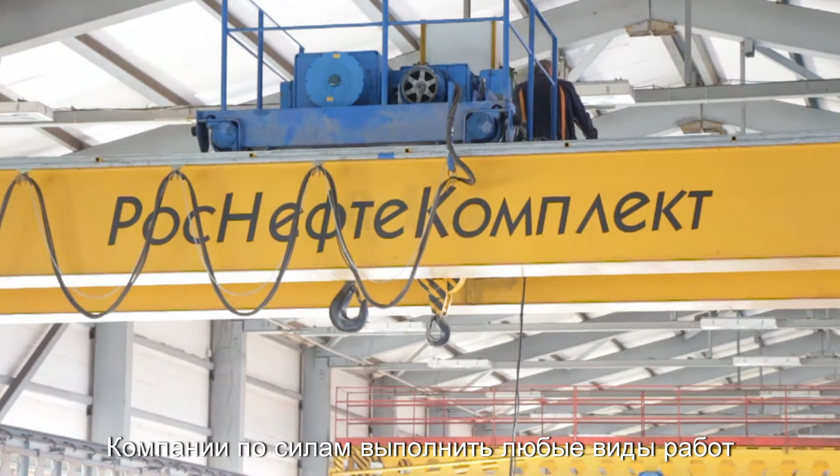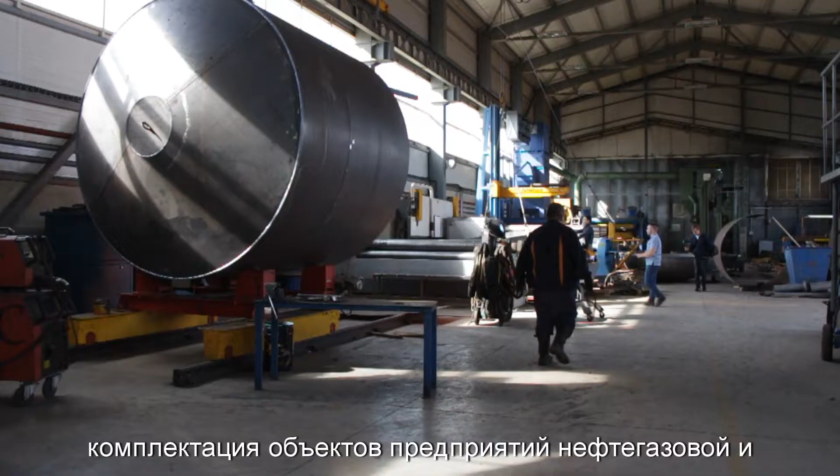At the moment, Rosneftekomplekt has a wide range of services. We are capable to fulfill different activities: construction and reconstruction, fabrication of packaged products, fabrication of tanks and vessels, fabrication of steel structures, engineering procurement for companies in petroleum and power industries.

RNK is a big and coordinated team. Our specialists have got everything to resolve process tasks of any complexity, that is to say, professional knowledge, high working efficiency and commitment, pursuance of perfection and teamwork skills.

Engineering and technical staff possesses high-level background and are able to perform timely and qualitatively the whole range of works related to construction of process facilities in petroleum industry.

Rosneftekomplekt performs as a general contractor while implementing large-scale projects on a turnkey basis. In order to fulfill construction and installation activities in full scope, the company is equipped with special equipment and machinery. Total number of available equipment and machinery owned is over 100.

For the time of operation, Rosneftekomplekt performed a great scope of engineering, construction and installation activities. Our clients are international companies such as MOL Group, Vostok Energy, Transneft, Rosneft Oil Company, Lukoil, Tatneft, Gazprom Neft, Sibur Holding, Irkutsk Oil Company. Rosneftekomplekt owns 2 bases for engineering support services with a total area of 5 hectares.

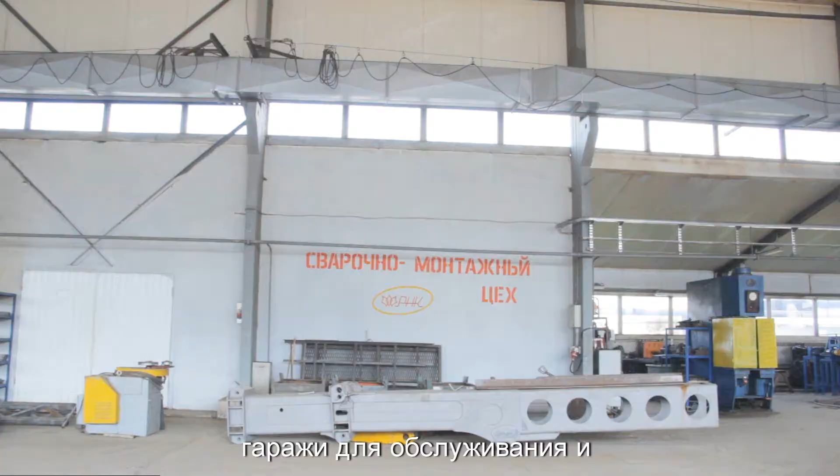These have warehouses, maintenance workshops and special machines, fabrication shops for modular packaged units, tanks and vessels, steel structures and process units. The shops are equipped with all required machines as well as welding, process and lifting equipment.

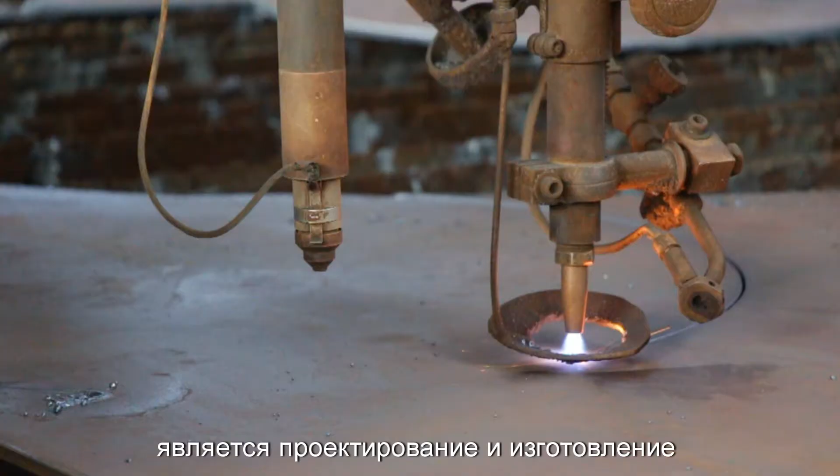One of the company's streams is engineering and fabrication, followed by installation of modular packages. All products are ready-to-operate products that require minimum assembly on a construction site.

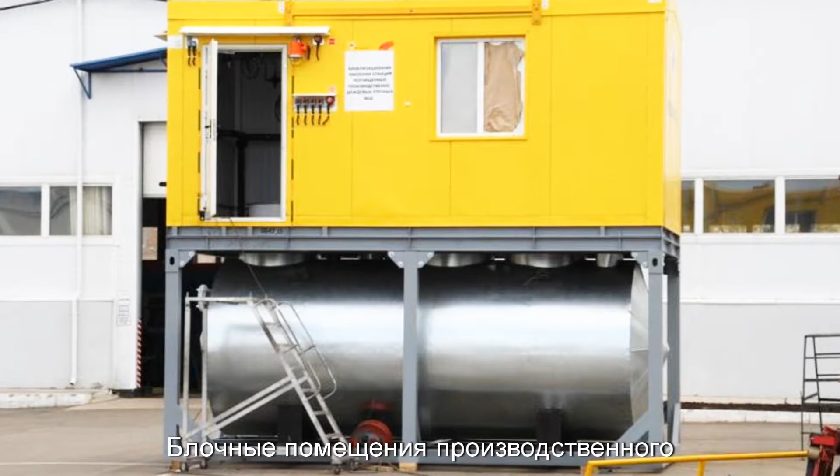Quality and quantity metering stations in a modular container, diesel generator stations in modular containers to provide clients with power, an option to allocate distribution gears and communication relay station, modular packaged premises to allocate process equipment adapted to maintain required climate conditions, modular pumping stations for oil, water and chemical pumping, modular premises for production and household use, control rooms, laboratories, checkpoints, workshops, modular containers for warehousing and accommodation.

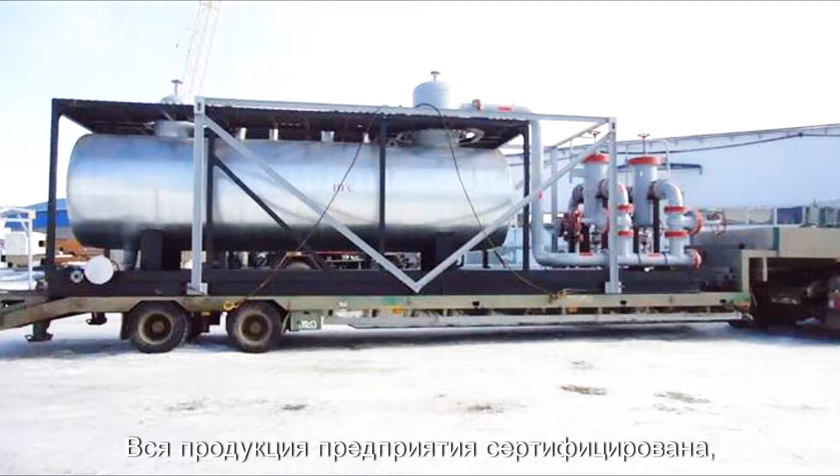The products are fabricated in accordance with technical regulations and standards. All company products are certified and ISO 9001-2000 has been implemented.

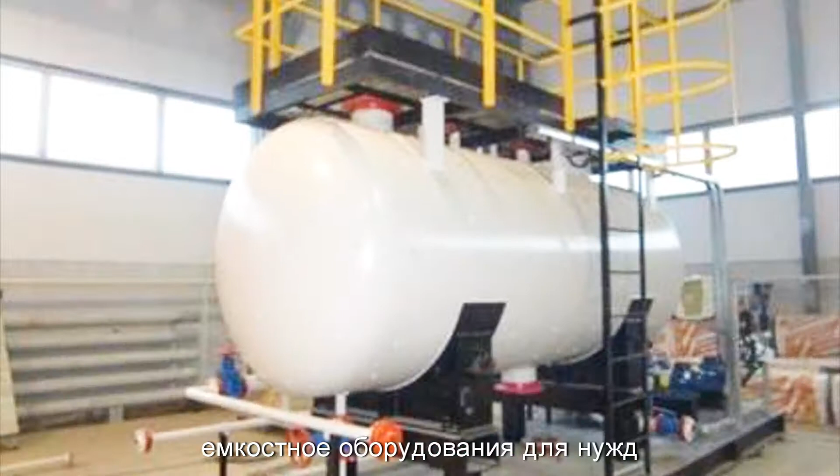Rosneftekomplekt has mastered technologies and certified production of tanks and vessels. Steel welded tanks and vessels production line is set up. Standard and non-standard vessels and tanks are fabricated for the needs of refineries, gas treatment plants, chemical industries, for construction of gas and oil pipelines, as well as a wide variety of industries where tanks and vessels are required.

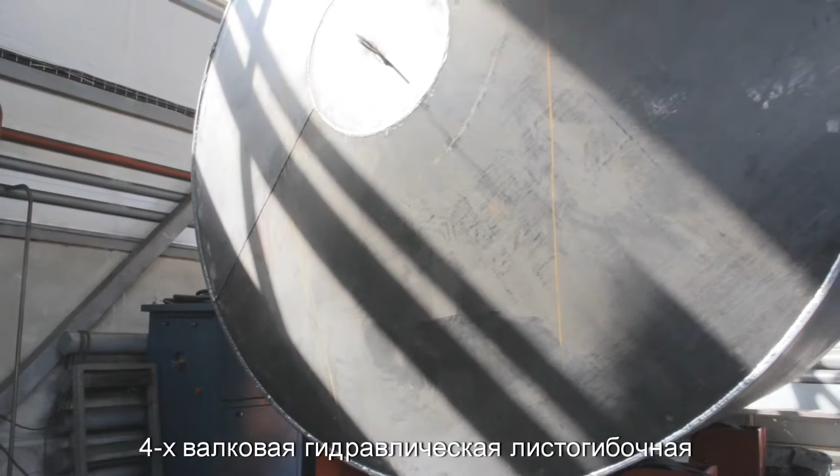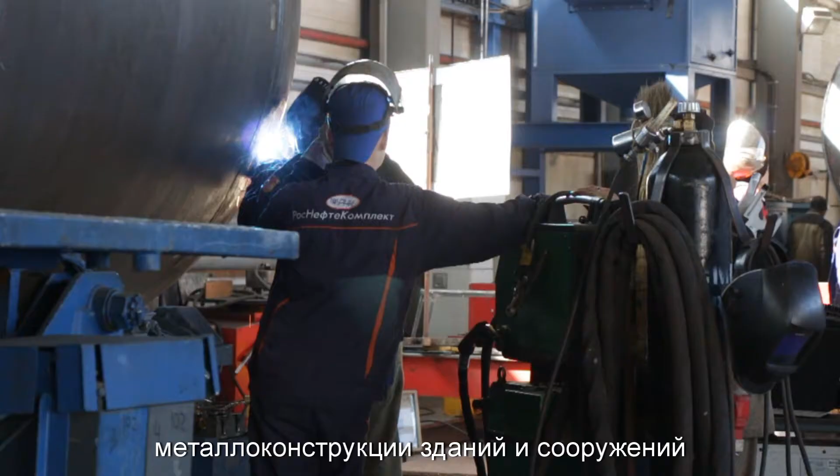Rosneftekomplekt fabricates steel structures of any complexity such as steel structures for buildings and facilities, columns, beams, trusses, framework, crossbars and stands, bracings, stairs, platforms, guards, pipe racks, floodlight towers and lightning rods, pipe supports, steel fences and enclosures.

Special equipment is used during steel structures fabrication: plasma cutter for cutting of all steel grades, guillotines used for steel chopping, and welding equipment.

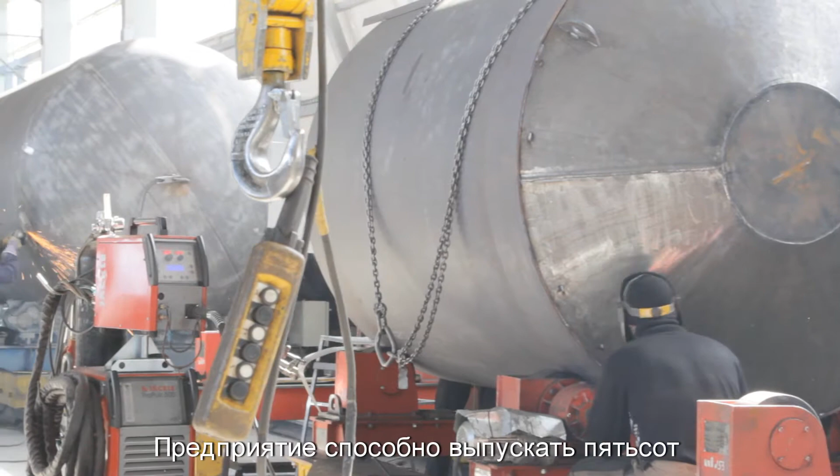The company is capable to produce 500 tons of steel structures per month. Moreover, this is not a limit. An ambitious program of re-equipment will double the efficiency due to upgrading of existing capacities. 5 to 6 thousand tons of steel structures are produced from the shops annually.

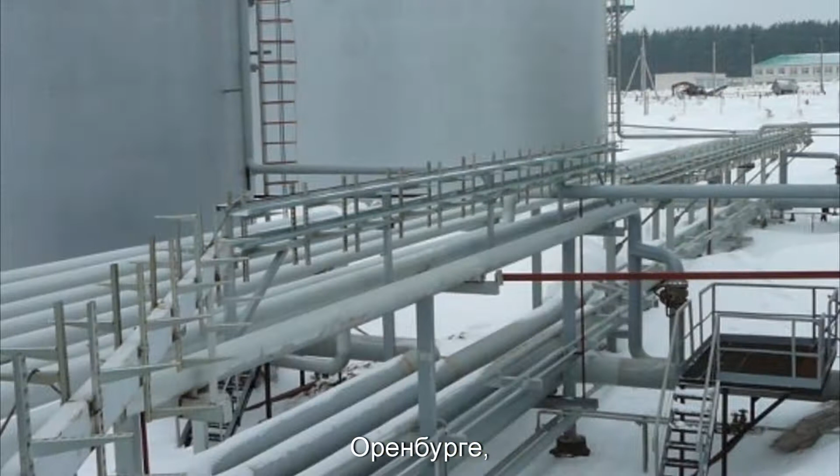The geography of the company is also impressive. The team had to work in Samara, Syzran, Krasnoyarsk, Orenburg, Perm, Saratov and other Russian cities.

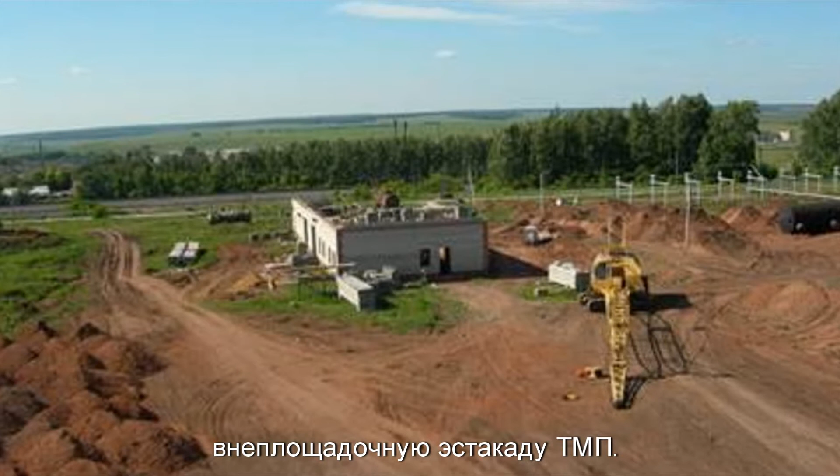A year after, in 2006, our specialists provided a large scope at the Uralska transfer and acceptance point with a tie-in to DN1000 Perm-Almetyevsk oil trunk pipeline. Reconstruction of the oil pump station along with replacement of existing pumps with electric-driven duty standby ones was performed under the contract.

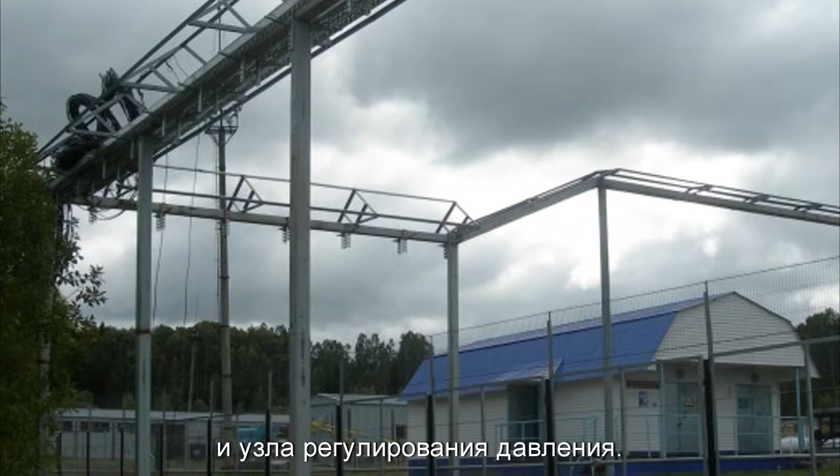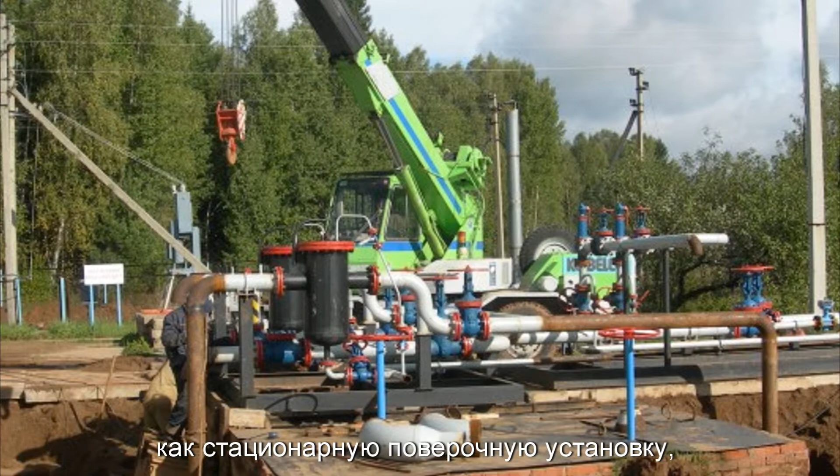Test laboratory, tying point to pump station, safety valve platforms and pressure maintenance unit were reconstructed. The Uralska transfer and acceptance point was built for Uralska Oil Company. We installed large-sized equipment such as fixed calibration units, filter units platform, underground drain vessels, control room, MCC, pipelines and landscaping. 2007 was marked with new achievements in our history.

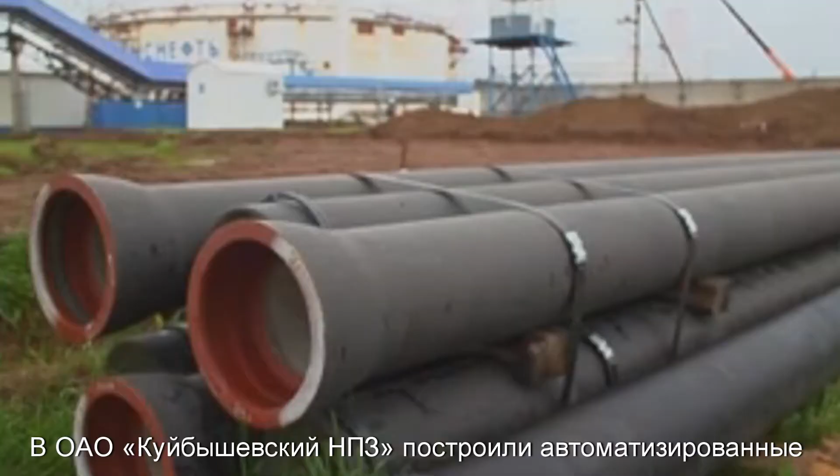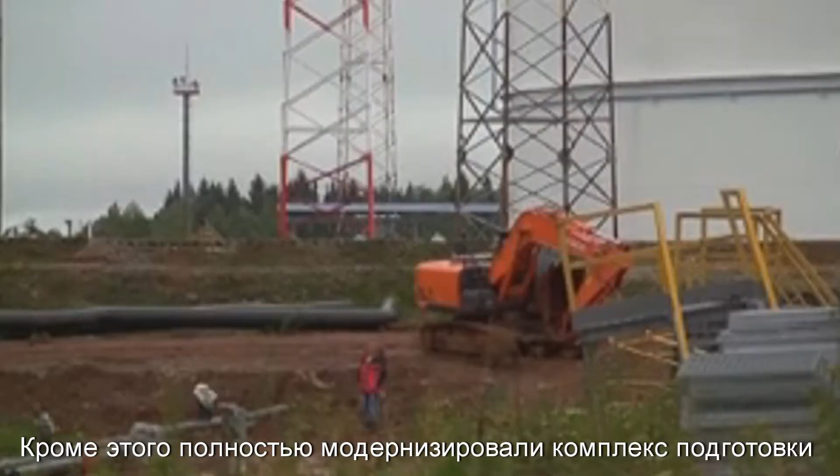Automated additives injection unit was installed in the Kuibyshev refinery. Owing to that, the quality of produced fuel was brought up to Euro 3 and Euro 4 standards. Besides, the whole plant for oil treatment and delivery to trunk pipelines was upgraded, from warehouses and utilities to the flare system. Our specialists built a gas compressor unit at a low-tonnage fuel production plant in 2008.

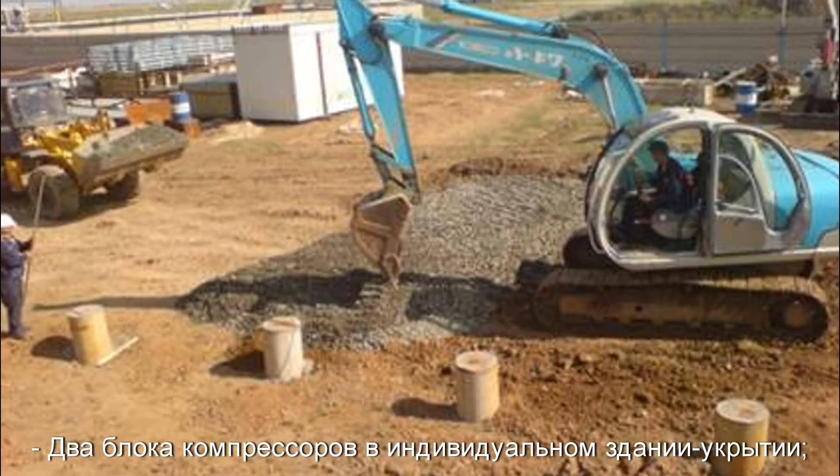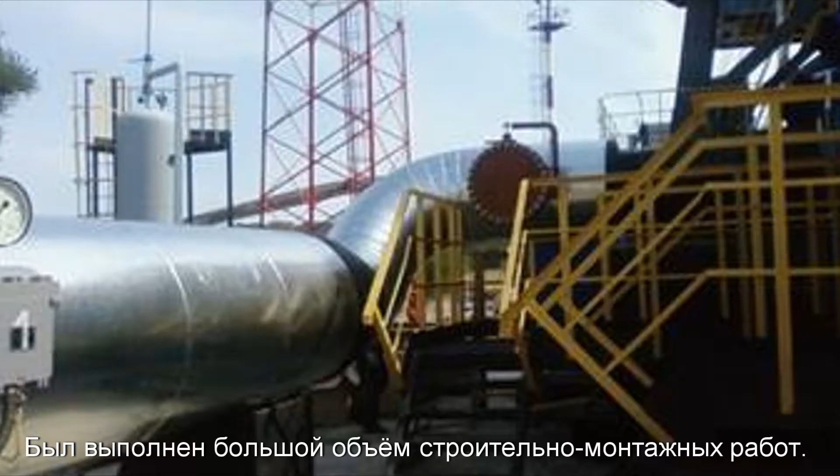The equipment package consisted of the following units: 2 compressors in an individual shelter, 2 closed-circuit water cooling units, interstage gas cooling for each compressor, gas discharge unit, drain unit, switch room container, and nitrogen unit in a container. This year we also provided reconstruction works at the Samara K7 Sokovka gas pipeline, a huge scope of construction and installation activities such as foundations, hookup, start and fuel gas treatment plant.

In 2009, our people were involved in field infrastructure development of the western side of Bortovoy field in Saratov Oblast. It was the first phase of construction of Karpenskaya gas treatment plant. The footprint area provided for the plant, along with the flare system, was about 19 hectares, and this task was successfully resolved. Everything for successful and uninterrupted operation of the field was installed at the gas treatment plant, including laboratory, garage, boiler house, water supply and firefighting facilities, transformer substation, production and household premises.

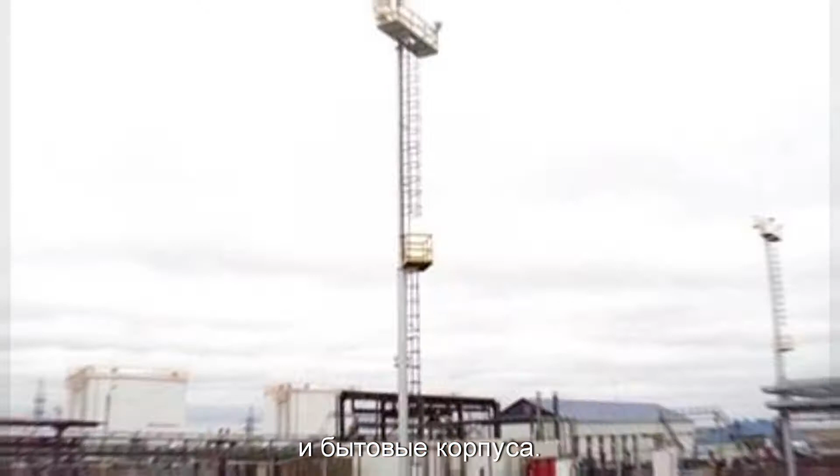R&K also performed construction of effluent treatment facilities and a sewage pumping station as part of reconstruction of the Pokrovskaya oil treatment unit in 2010. At the same time, the storage tank for treated produced industrial and stormwater was repaired.

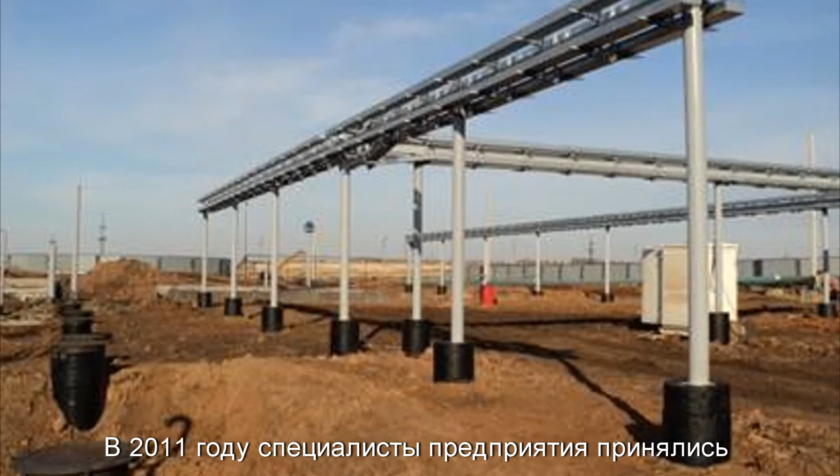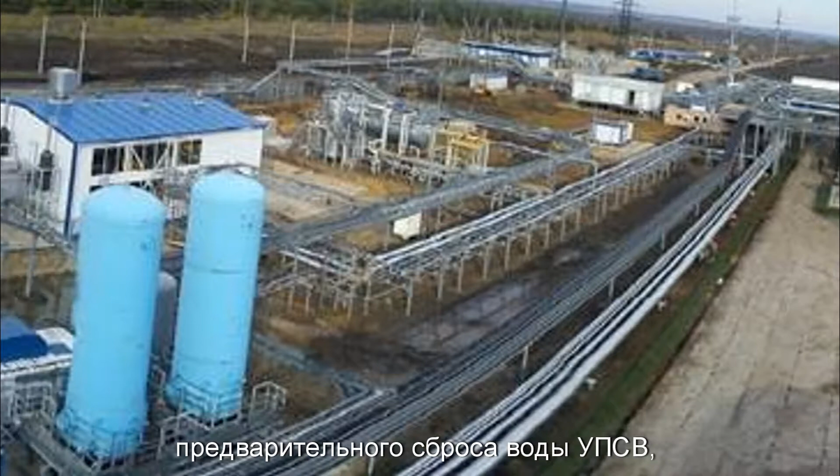In 2011, we started construction of the initial water separation unit at Garshin field. Scope of contractual works included construction of process piping as well as installation of supporting structures of the initial water separation unit and flare system. Besides, construction of access roads, including installation of protective cases and culverts and a passing road under the Buzuluk-Uralsk motorway, was provided. Communication networks were installed.

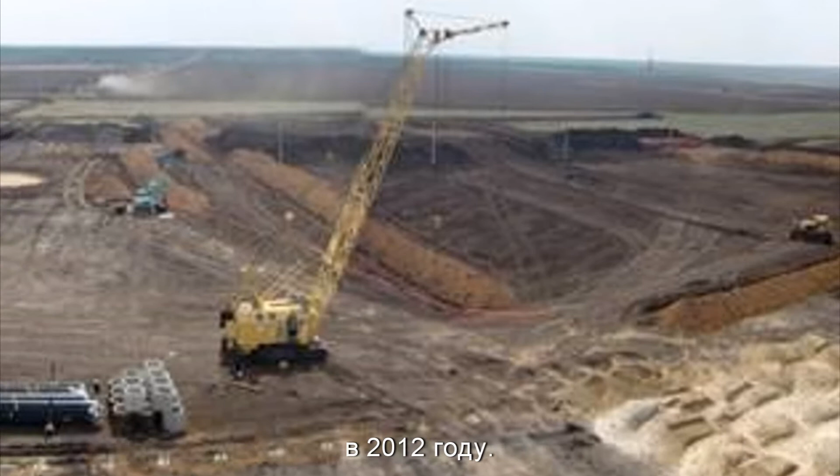Our personnel started construction of a gas compression unit at the Sorochinsko-Nikolsk oil treatment plant and Samadurov initial water separation unit in 2012. Another important facility is a gas turbine plant at Baitugansk oil field, and reconstruction of the oil treatment plant at the Baitugansk oil field for Baitex LLC.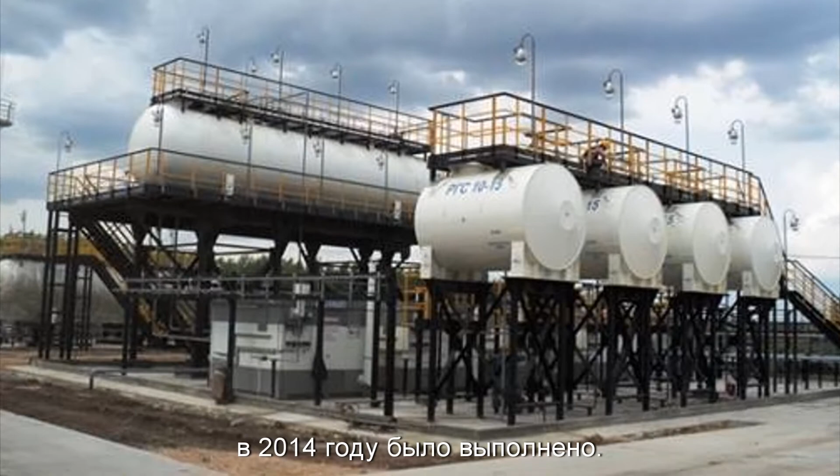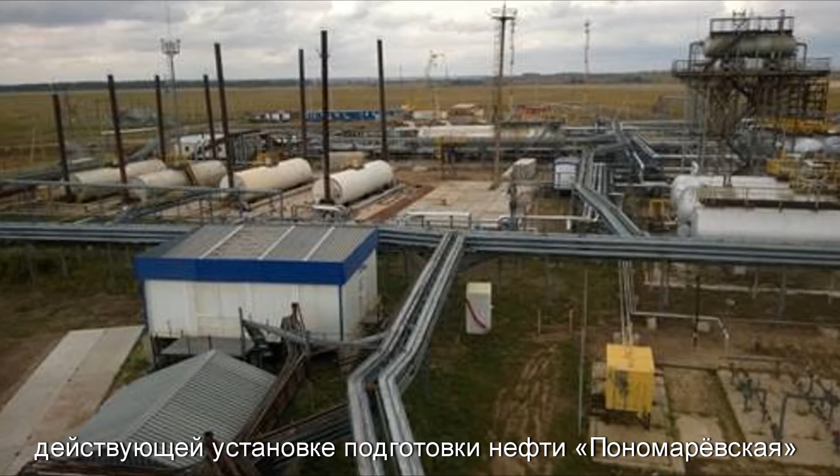Technical upgrading of the Samadurovskaya initial water separation unit, water alternating gas unit and well-killing fluid preparation unit at IWSU was performed. A year after, reconstruction of Ponomarev OTP was made according to design assignment, which was focused on stabilization of the process method at the existing Ponomarev OTP, utilization of two-stage separation gas for all needs, and thereby 100% utilization of the gas received at OTP is achieved, as well as bringing the plant in accordance with applicable standards.

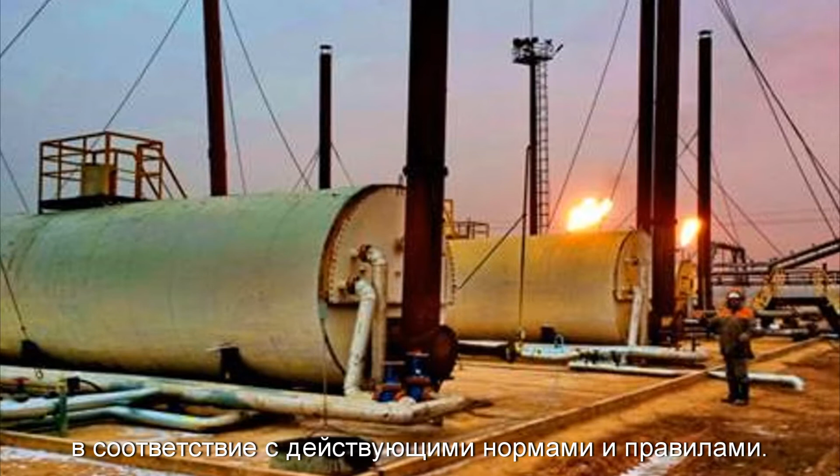Rosneftekomplekt also contributes a lot to agricultural development. Experts of the company fabricate Tamerlan 1800 stone collectors. In addition, Breeze 15 grain dryers are produced. These machines are designed for stable corn flow.

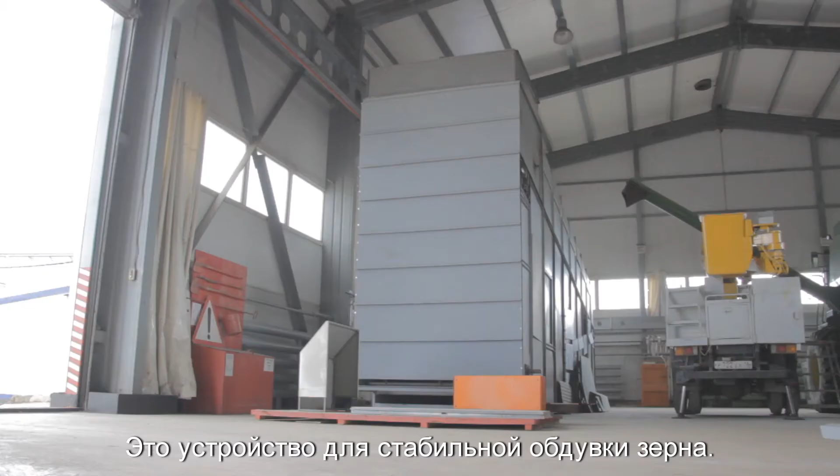RNK established the state-owned farm breeding ground Stepnoy in 2014. These areas are bordered with a state breeding ground Stepnoy named after Shevkovskych. The core business of the state-owned farm is production of permanent grass seeds, bean cultures, and development of land reclamation technologies. Only organic products are grown in the fields. Organic fertilizers are used exceptionally, without use of chemical plant protection products. Therefore, the company was awarded the Organic Farming Certificate for compliance with European Environmental Production Regulations.

Now we have a right to provide our own agricultural products with a relevant European leaf identification mark. This is a sign of compliance with organic standards of the European Union.

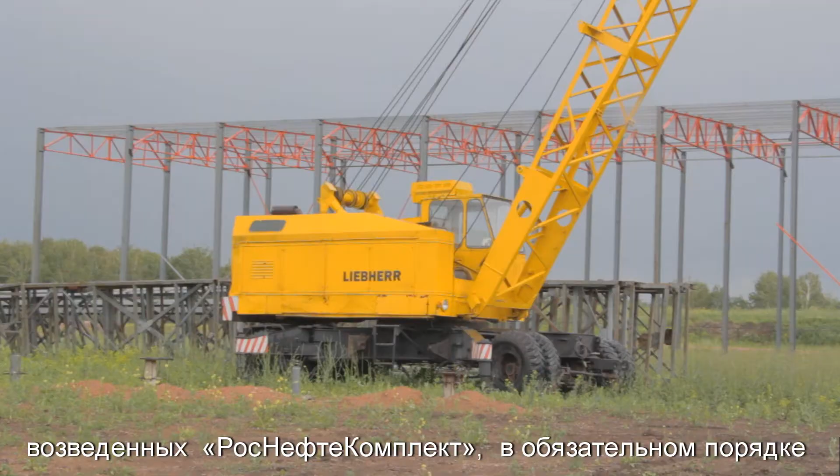Land reclamation is provided in a mandatory manner in the petroleum industry where RNK was involved. Consequently, saving of nature systems and environmental safety are the main points of the company's strategy.

An affiliate company, Rosneftekomplekt Kazakhstan LLP, was launched in Uralsk, Kazakhstan in 2005 for the purpose of extension of service range. The company specialists fulfill construction and reconstruction activities for production companies as well as oil treatment, processing and transportation areas within the Republic of Kazakhstan.

Regular, stable engineering and qualified manpower of various disciplines with high experience in the construction industry and within the largest companies in the fuel and energy complexes of Russia and Kazakhstan allows Rosneftekomplekt Kazakhstan LLP to fulfill a large volume of construction and installation activities on reconstruction, total overhaul and construction of oil and gas facilities within the shortest time period using its own resources. The main goal is quality of services, and for this purpose the company is constantly improving the construction project management system, procuring the newest equipment and software, and training people.

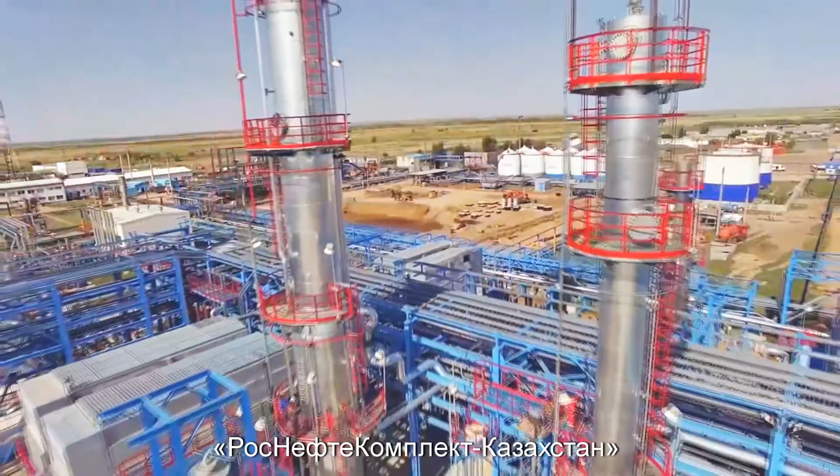Rosneftekomplekt Kazakhstan has a modern fleet of construction and installation equipment, machines and machineries to complete the full scope of construction and installation activities. This fleet is constantly added and upgraded with new machines and mechanisms procured.

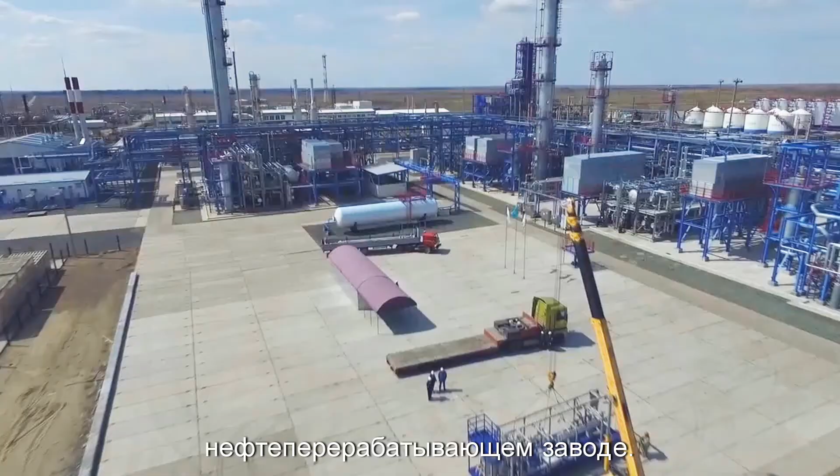As of today, Rosneftekomplekt Kazakhstan is presented as a general contractor of Condensate Joint Stock Company, the biggest Kazakhstani company, whose core business is processing of raw hydrocarbons at the refinery. Rosneftekomplekt Kazakhstan is one of the sustainable service providers for major Kazakhstani companies such as Intergas Central Asia, Kazmunaygas Exploration and Production, Karachaganak Petroleum Operating BV, and Atyrau Refinery.

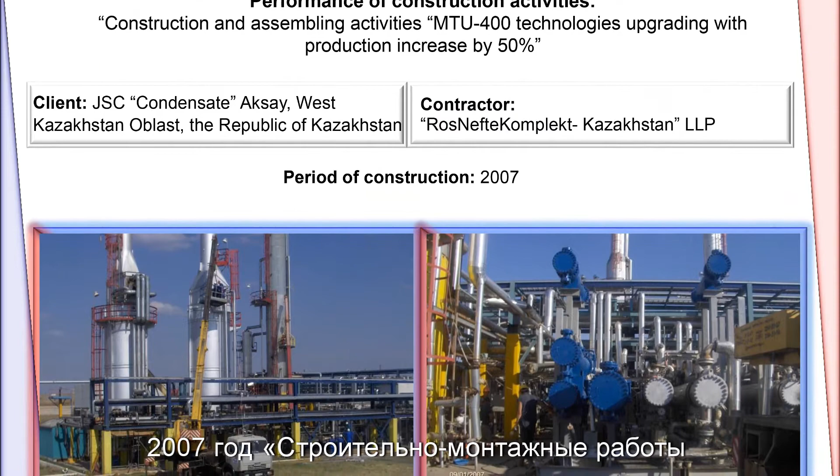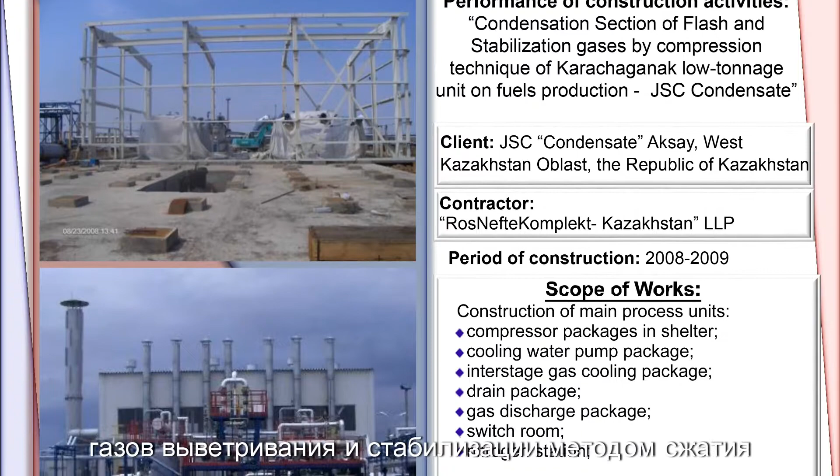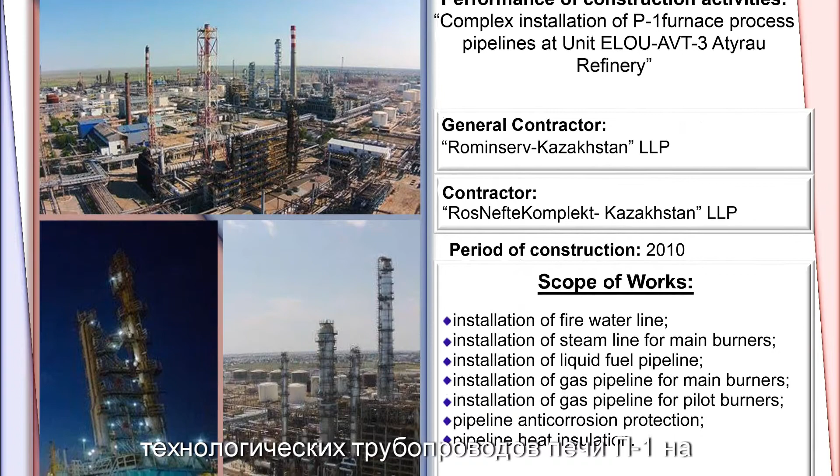The following facilities were delivered over the company's operation. 2007 – Construction and installation activities, MTU 400 technologies upgrading with production increased by 50%. 2008-2009 – Construction of condensation section of flash and stabilization gases by compression of the Karachaganak low tonnage unit on fuels production, Condensate JC. 2010 – Complex installation of P1 furnace process pipelines at Unit ELOU-AVT-3, Atyrau Refinery.

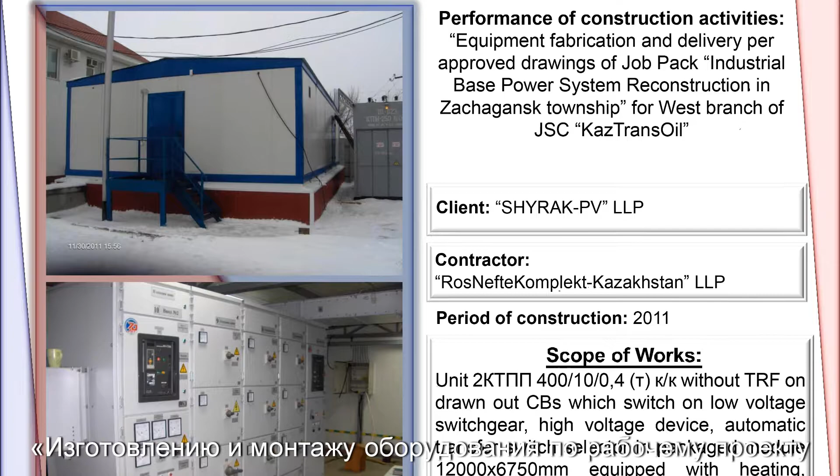2011 – Installation and hookup of two 2,000 cubic meter tanks. 2011 – Equipment fabrication and delivery per approved drawings of job pack industrial base power system reconstruction in Zachagansk Township for West Branch of KazTransOil JSC.

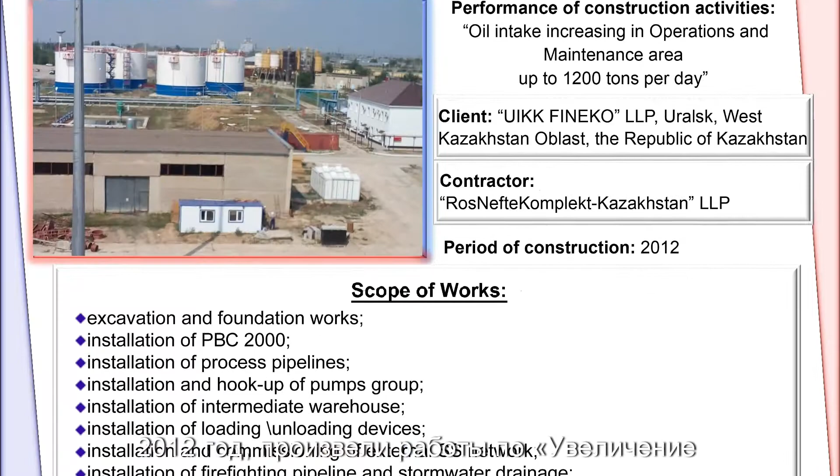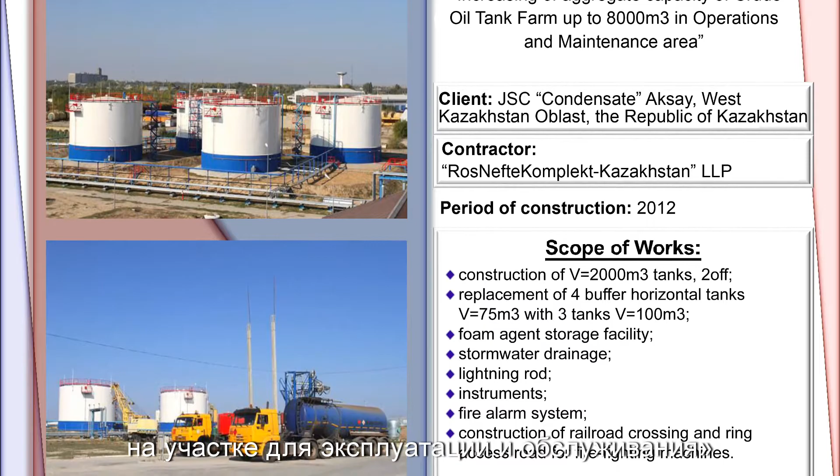2012 – Works related to oil intake increasing in operations and maintenance area up to 1,200 tons per day were fulfilled. Works on increasing the total capacity of oil storage tank farm up to 8,000 cubic meters within the maintenance and operation area. As of 2012-2013, construction in the territory of the maintenance and operation area of a vehicular unloading system.

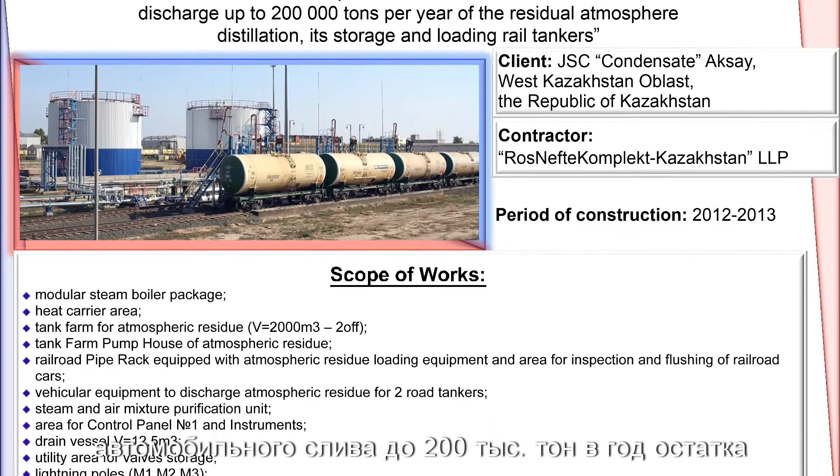Up to 200,000 tons per year of atmospheric residue, its storage and loading into railway tankers. An intermediate tank farm consisting of 5 tanks was provided in 2013-2014.

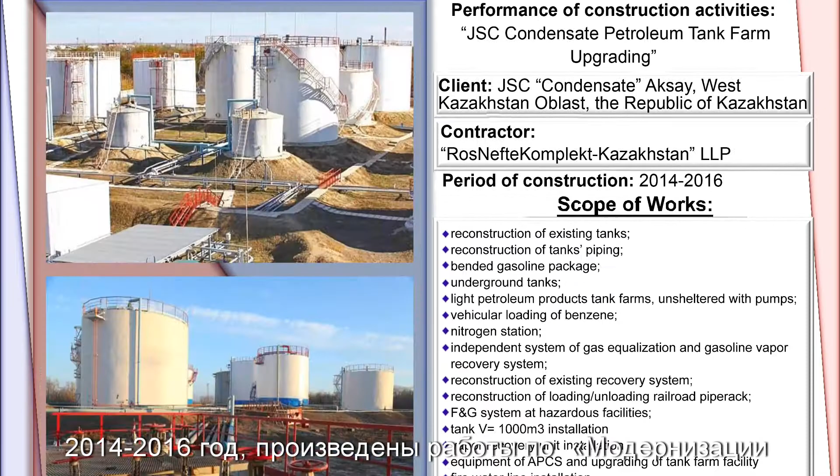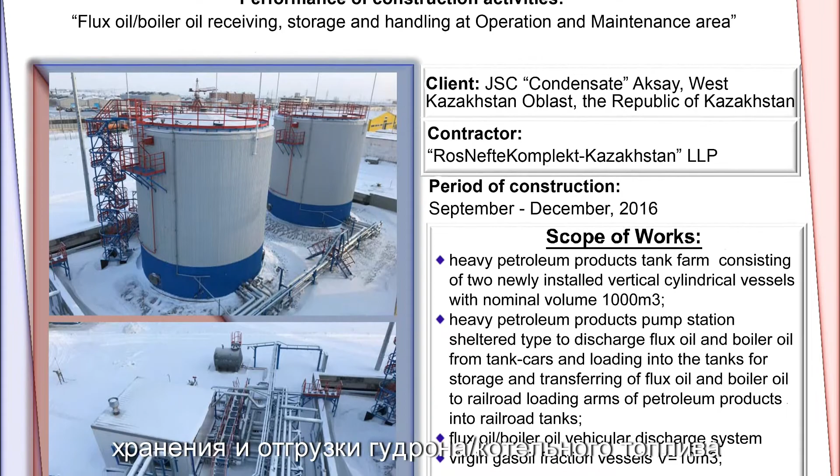2014-2016 – JSC Condensate petroleum tank farm upgrading. For the period from September to December 2016, the project Flux Oil Boiler Oil Acceptance Storage and Unloading Facility at the Operation and Maintenance Area was implemented.

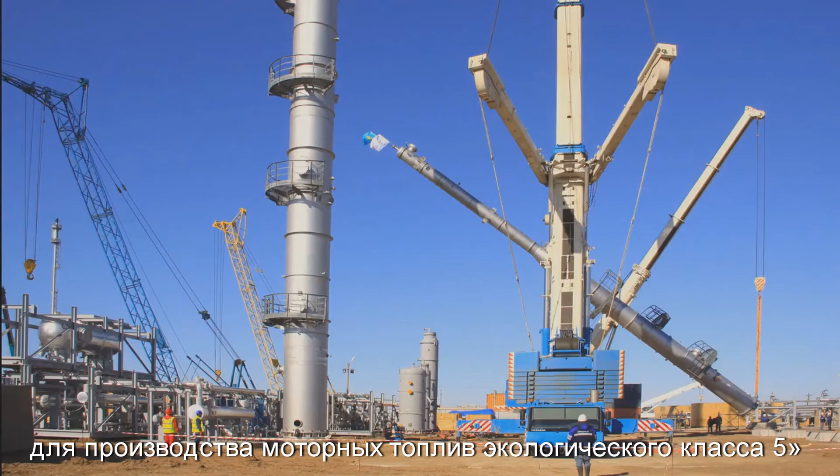One of the biggest facilities built up by RNK Kazakhstan is the first startup complex of the second stage of construction of a low tonnage unit to produce emission class 5 motor fuel. The client is Condensate Joint Stock Company.

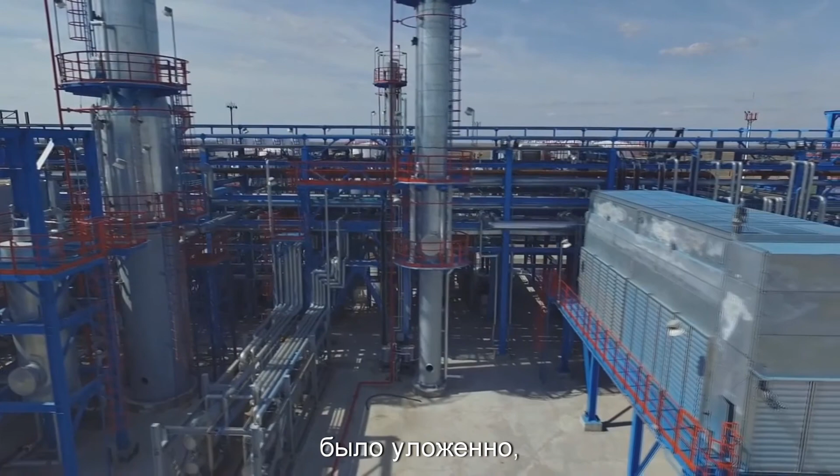Period of construction from 2014-2016. Over 17,000 tons of concrete and reinforced concrete structures were installed. 35,000 tons of sand gravel mixture and 28,000 tons of crushed stone were produced. About 3,000 tons of metal structures were mounted and installed.

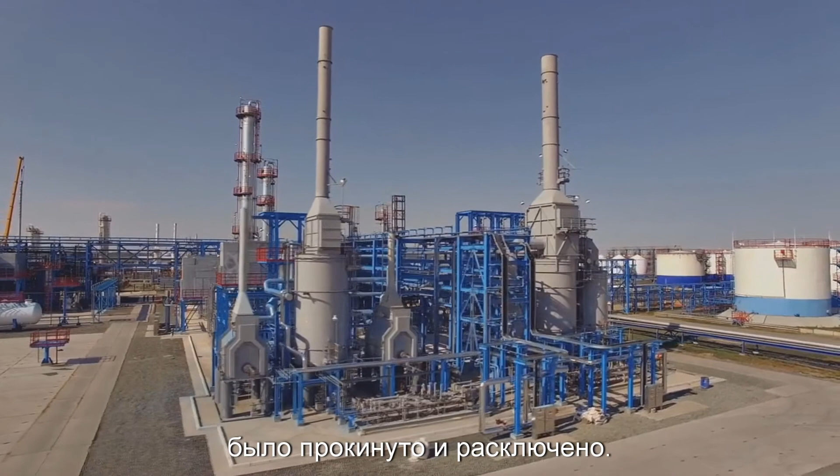Over 44,000 meters of pipelines. The total weight of the installed equipment was 2,500 tons, and over 138,000 meters of cables were pulled and terminated during the reconstruction period.

At the moment, construction of the upgrading of the stabilization section and CDU of the low tonnage unit for fuel production, to increase the volume of raw materials processing up to 850,000 tons per year, is scheduled to complete in July 2017.

Rosneftekomplekt Kazakhstan is constantly striving towards new levels of technical and business development. Particularly, striving to move forward leads our company to achieve its goals. For the client, we are ready to make the path from development of a construction project and performance of construction and installation activities to bringing the facility into operation.